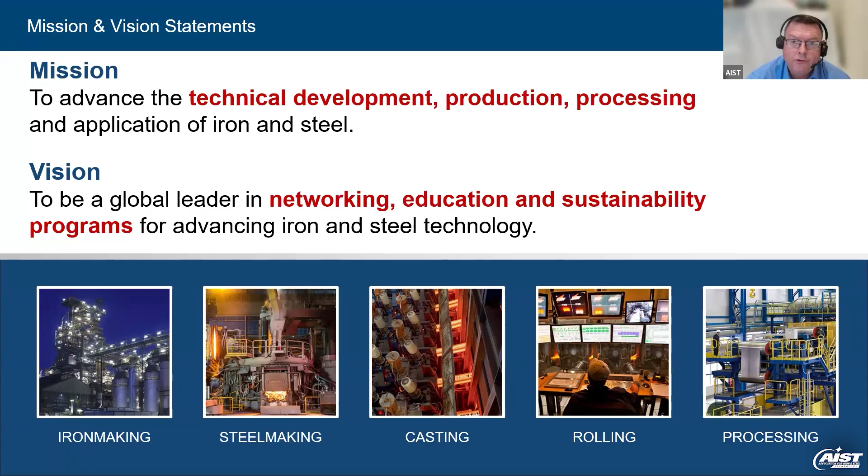Although AIST is headquartered in the USA, our mission is without national borders. So we promote membership wherever there is a strong value proposition to fulfill our mission and vision. We now have 22 member chapters on 6 continents. Each chapter conducts their own activities in their region. With this extensive network, AIST is positioned to interact with the global steel community and disseminate information about the latest technology advancements for steel wherever they may be evolving.

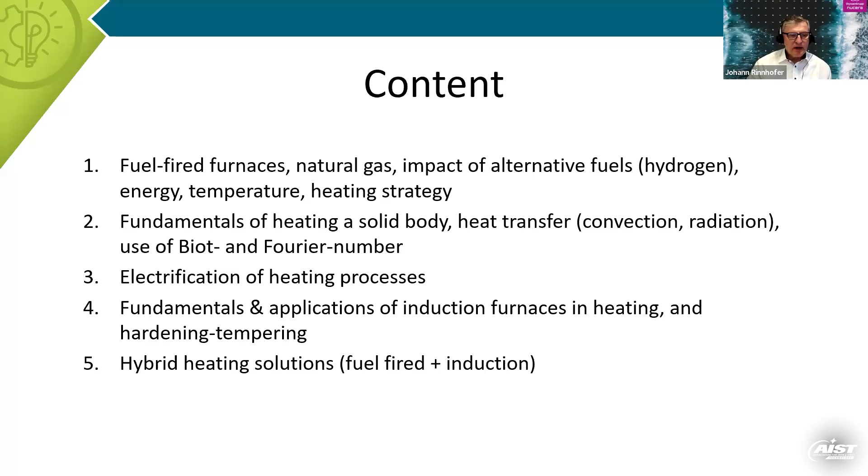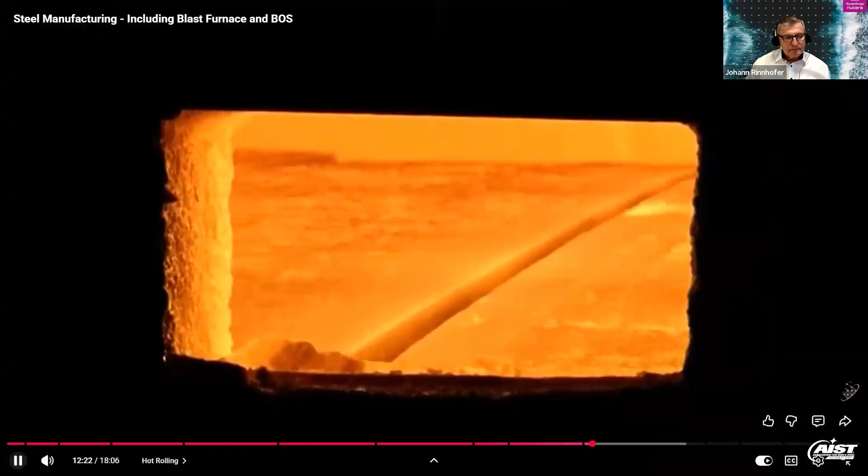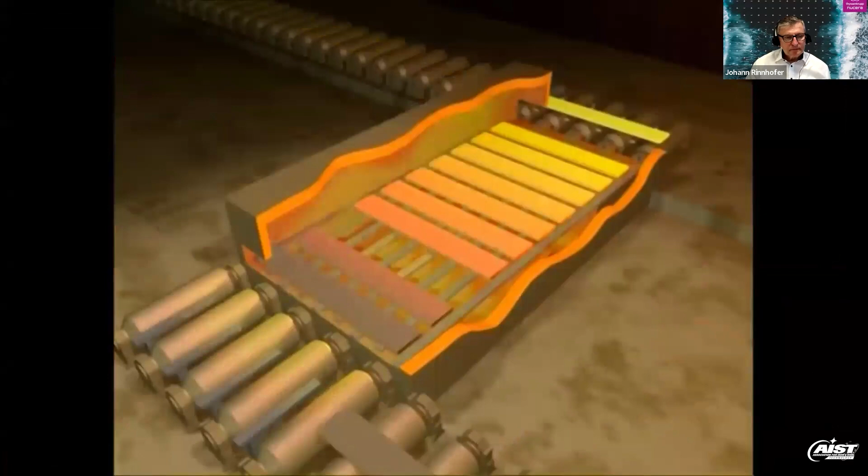So let's go into this little video. Steel is highly resistant to shaping when it's cold, and for that reason, it's generally rolled whilst it's hot. To make sure the steel is at the correct temperature for rolling, it's fed into a furnace. Here it travels through several temperature control zones until it's at the correct temperature and ready for rolling. Whatever the product, the principles of hot rolling are the same.

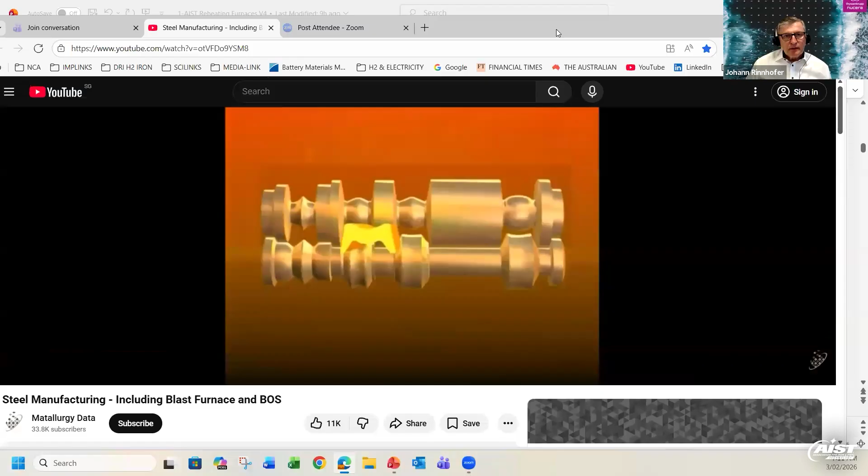It was a very short video just showing the walking beam furnace in a rolling mill. But why are we doing that? What is steel? Steel is, as you can see here on the iron carbon diagram, an iron carbon alloy with a carbon content of less than 2%.

It has different melting temperatures, so it can be 1500 degrees. It can also be 1150 degrees only when you have a carbon content of 4%. So it's a very interesting material. We have more than 3,500 types of steel for that reason, because we have so many options to alloy steel with carbon and also other alloys like chromium, nickel, and other metals, and also heat treat them in different modes, so to say.

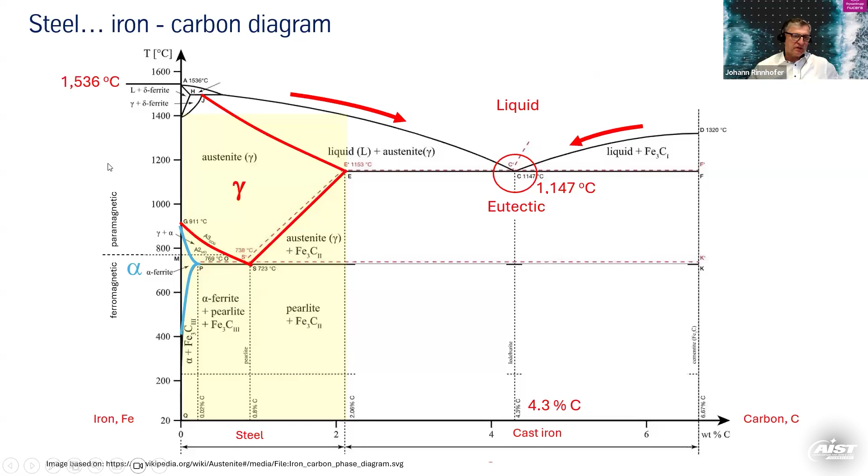A very interesting feature is the different crystal shapes which we can have. This is the austenite at high temperatures and the ferrite at low temperatures, and all sorts of combinations in the end. What we will also need later is a special feature of steel, which is the magnetic properties of the steel. Below the Curie temperature, which is around 770 degrees C, steel is ferromagnetic, and it is non-magnetic beyond that temperature. So that is very important for induction heating. This is why this is important.

Typical heating temperatures for reheating are in the area of 1200 degrees, because steel is malleable at this high temperature in the austenite area, basically. This is because we have a face-centered cubic crystal structure which offers slip systems. So you cannot shape and form steel in a cold condition like you can at these high temperatures, as we all know from the forges.

What is very significant is the magic line around 900 degrees. This is the red line where you come into the austenite area, and you can change the shape of the crystal, as we said in the beginning, from body-centered into face-centered. This is why we always have to pass this magic line, the austenite line, for heat treating, for austenitizing and hardening, for example.

Tempering can be at much lower temperatures because we don't necessarily change the crystal shape again. During rolling, forming, or forging processes, the austenite grains are constantly broken down and recrystallized again, which is why we get a very specific crystal structure in a forged or rolled product. We have all sorts of technologies like thermomechanical rolling and others, but we cannot go into too much detail here.

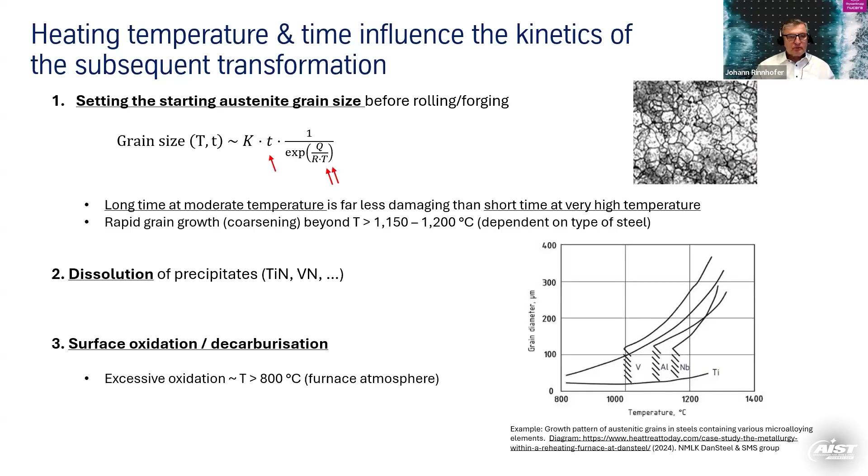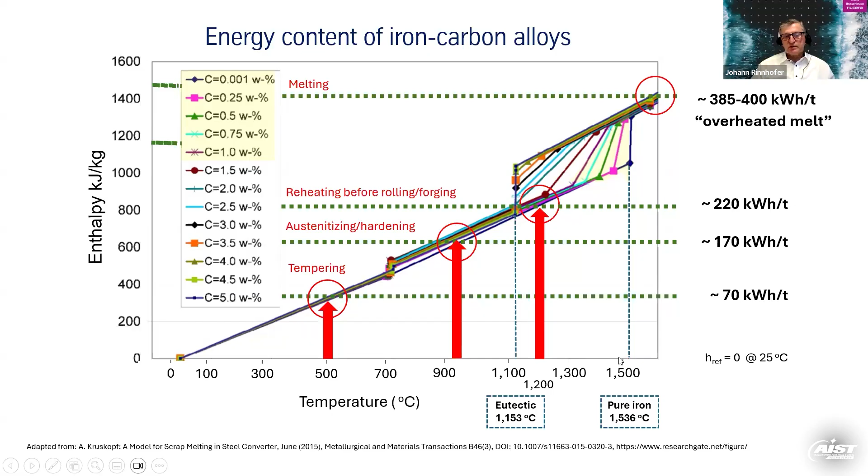So when we look at the major energy consumers in an electric arc furnace based rolling mill, you see the electric arc furnace has 385 to 400 kilowatt hours per ton incorporated energy in the steel, which in the end will require us to spend approximately 650 kilowatt hours per ton, because we are operating a real process with energy losses and other things that come with real conditions.

The same is true in the reheating furnace. We have this 220 kilowatt hours per ton worth of energy, which we end up spending approximately 330 on, because of losses. The rolling stands also have electric energy consumption. You can see that electricity in this whole process is approximately 40 to 55% of the total energy demand of these three aggregates, and the fuel is around 45 to 60%.

This depends on how you run the electric arc furnace, because you have different options. Either you use very low electric energy in the furnace with a high fuel rate, or the opposite - you can run it at very high electricity consumption with low fuel consumption, but we will never completely eliminate fuel consumption in the electric arc furnace. So the name electric arc furnace is a bit misleading in this sense, but this is how it is.

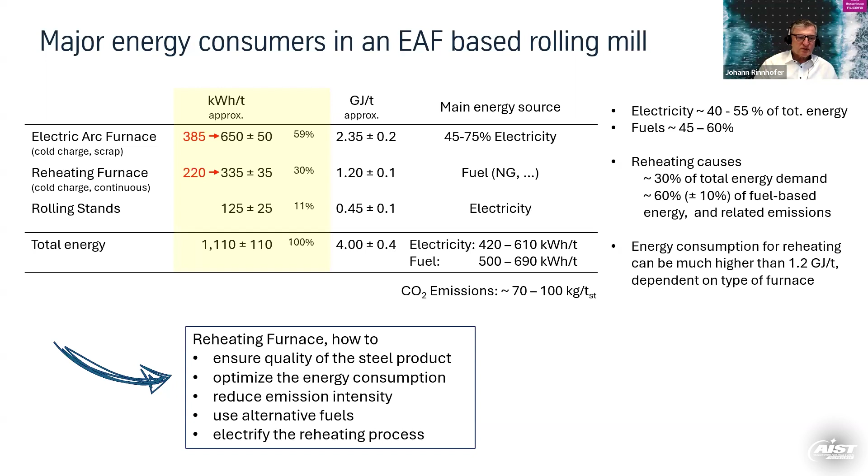Walking beam furnaces look approximately like that. We come in with the cold steel here on the left end and exit hot on the right side. You see a discharging machine here on the right side, and in the furnace we have a steam cooled system of tubes, like a stock carrier, so to say. This furnace is heated from the top and also from the bottom.

It usually has 3 significant zones. The hot zone, we have the soaking zone, which basically has the task of equalizing the temperature in the stock, from the surface to the core. In this zone, we operate at very high temperature, so there's not a lot of heat transferred in that area, but it's an equalizing zone, so to say.

A lot of heat we are transferring in the heating zone, which is in the middle here. We are heating up the steel, we still have a relatively low steel temperature, so it is a very good condition to transfer a lot of heat. This is a high temperature difference. We have large burners on the top and also on the bottom of the furnace.

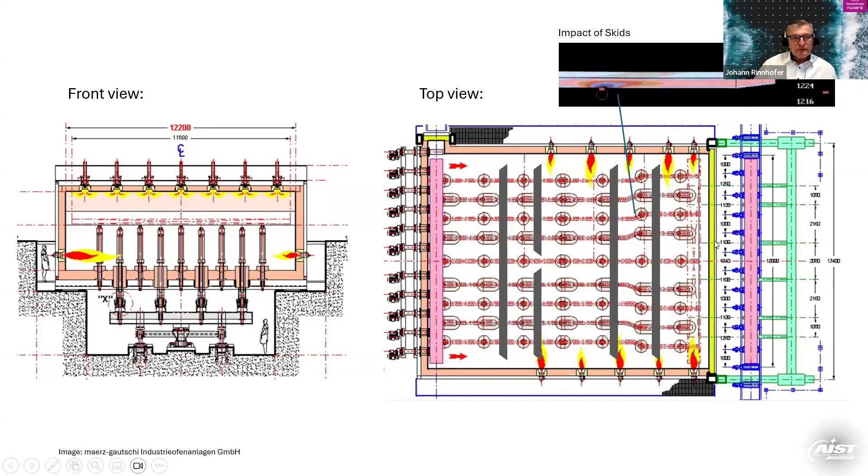When we look into the heating curve or temperature curve of these furnaces, they usually look like this. We start the heating process cold with cold steel, or it can be preheated, but usually cold. The furnace temperature is in the range of 700 to 900 degrees, and you have a very high temperature difference.

High temperature differences are very good for heat transfer, because the transferred heat is a function of the temperature difference from the furnace temperature to the surface temperature of the slab. We're talking about the surface temperature only, not the average temperature of the stock. The surface temperature is shown here as the slab top temperature, the blue line. The slab bottom temperature is the orange line, and the slab core temperature is the red line.

What we always have to look at is the temperature difference in the slab, shown here as delta T. It should not be too high, because we can get mechanical problems in the slab, including cracks, when this temperature difference is too high. So we have to watch the temperature difference and the surface temperature of the slab, and in the end we want a very equal temperature, say plus minus 20 degrees or so, in the slab. That's usually good enough for rolling a slab of 200 mil thickness.

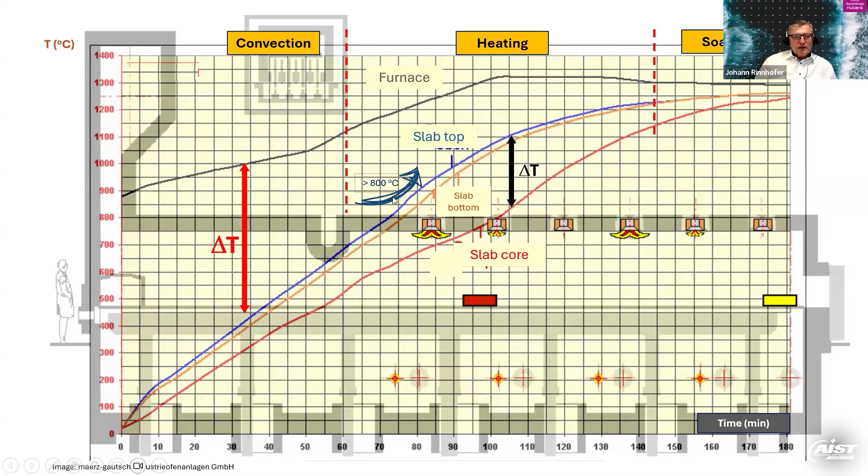So how do we design this process in the end? That's the question. We say, okay, scale is not good, so we're in the range of say 1% scale from the steel weight for such a heating process. It can be 3% - for example I saw 3% already in rotary hearth furnaces where you heat billets for a tube rolling mill, because you have a very high surface to volume ratio of these small billets.

On one hand, this is an economical loss because you're losing material - you're burning steel, basically oxidizing it, which gives a little bit of heat too, but iron is not a very good fuel in the end. So scaling is bad on one hand. On the other hand, it's good because you're healing surface defects on the steel, exposing virgin steel again, which is a good feature of scaling. So it's not only bad, it's also good.

So this is how it looks like. We are heating such a billet of 200 mil in a time period of approximately 180 minutes. This is just an indication of how these furnaces look like.

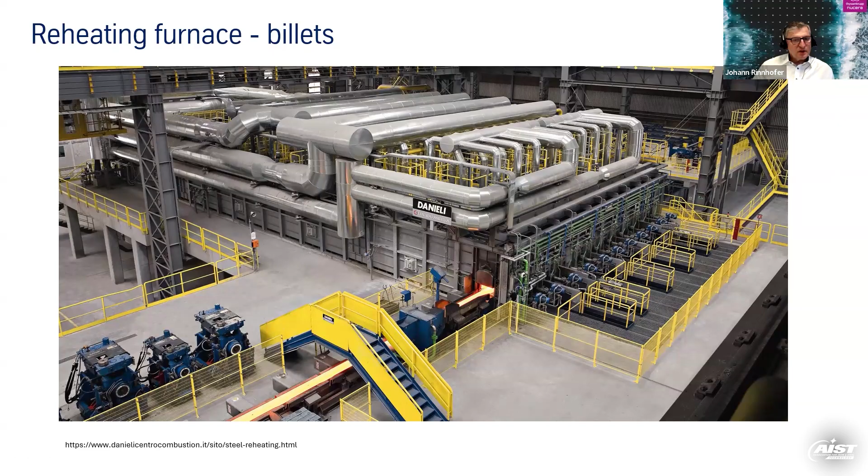You come in cold on the left side, go through the furnace, end up hot, and exit through a little door on the side in order to prevent air ingress. You see the small burners here in the soaking zone because, as I said, there's not a lot of heat transfer there - small burners. We have a lot of heat transfer in the heating zone, so large burners. And you see here the insulated air system - this combustion air is usually heated to 400 to 600 degrees Celsius in order to save some natural gas.

That's another view. So here you come in cold from this side, and come out hot here. Small burners in the soaking zone, large burners in the heating zone.

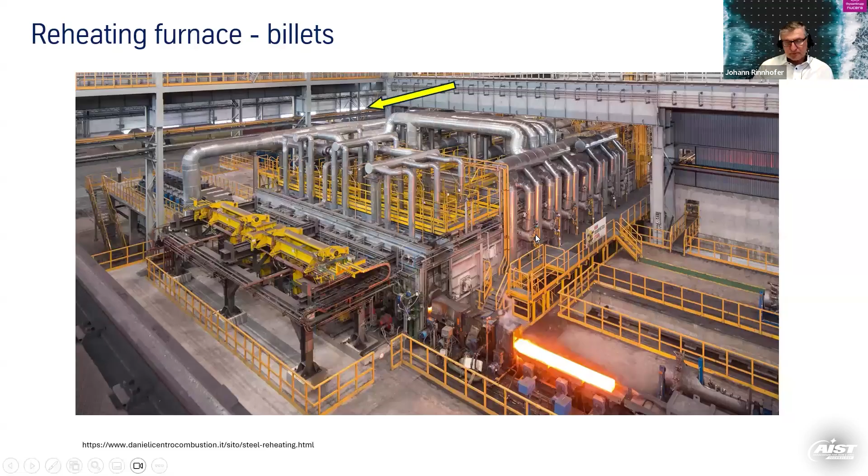This is how it looks inside the carrier system. You see here also there is an offset of the carrier system. And here it's all insulated.

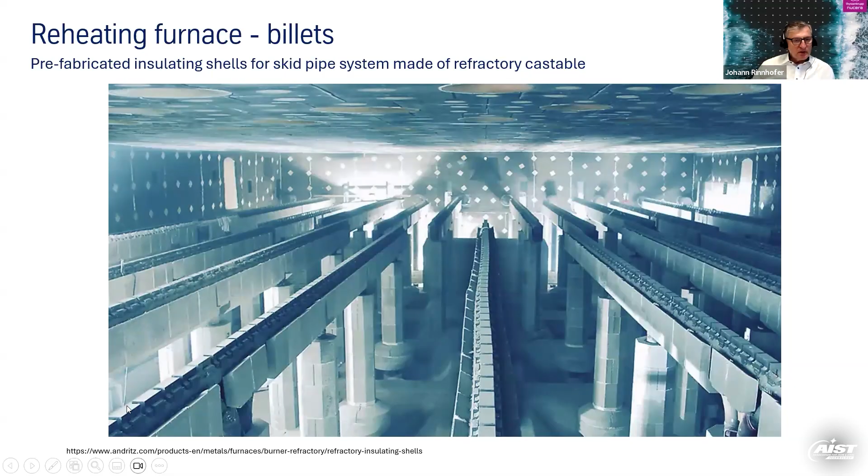It's a completely new furnace. You see the burners here on the top, radiation burners. You see the castings here on the top of the carrier system, which are carrying the slabs or the billets.

This is how a furnace looks like inside. See the refractory system, which is usually an aluminum oxide, silicium oxide system, refractory, and all precast or cast parts here. You can also have bricks, obviously, but this is usually how it is done today.

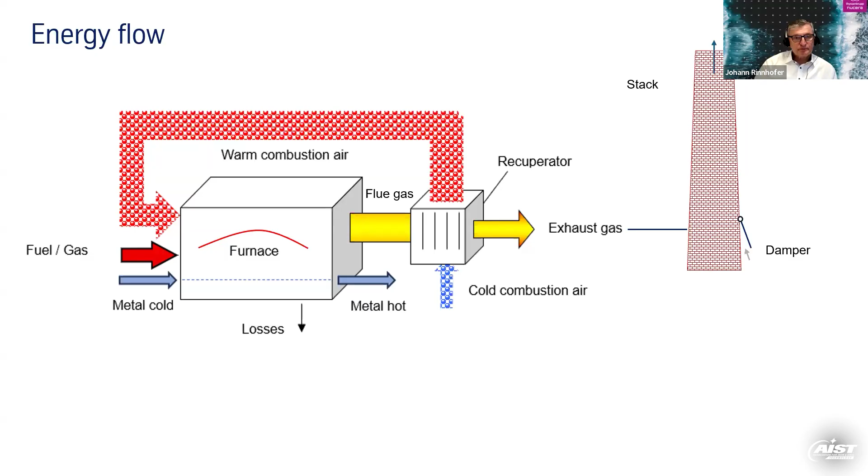So looking into more detail, what we do is look at the energy flow in the metal, here shown on the bottom, and also the energy flow of the gases. So we have the incoming gases, which is the fuel, and also the hot air with the sensible heat in the air that goes into the furnace, and out comes the flue gas. And there's a difference between these two energies. So we have the fuel and air coming in, and the flue gas going out of the furnace.

And if we relate this to the energy coming in with the fuel, we have this heating efficiency. So the difference between the incoming energies and the outgoing energies, when you look at the gas only, they are sort of useful to these energies go into the metal and also the losses of the furnace in the end. So we can say the thermal efficiency or heating efficiency of this furnace you can describe by the difference of the gases coming in and coming out, the energy of those gases, and they are covering the metal and the losses, the heat of the metal and the losses in the end.

So this is how you can calculate the thermal efficiency of this furnace, and we don't do this in more detail here. For rolling mill furnaces, they are around 0.65 to 0.7, maybe 0.8 maximum for a continuously operated furnace. So you always have some losses, and usually we will see that the flue gas loss is the highest loss.

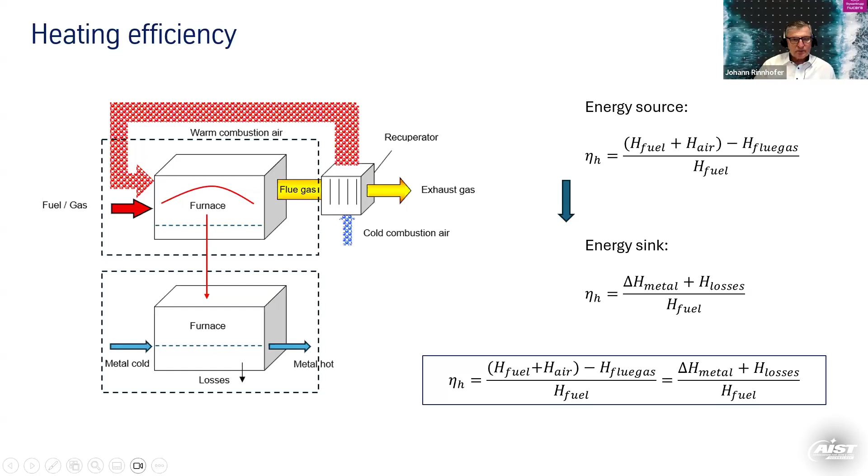So you have approximately 10 cubic meters of air for 1 cubic meter of natural gas. You have approximately 33 cubic meters of natural gas for 1 ton of steel. That equates into 330 cubic meters of air, or 400 kilos of air for 1 ton of steel in the combustion process. So when we calculate the energy in the combustion air now at 450 degrees and also 1000 degrees, we will end up at 52 kilowatt hours, just sensible heat in the air, or at 1000 degrees, more than 100 kilowatt hours per ton of energy in sensible heat in the air.

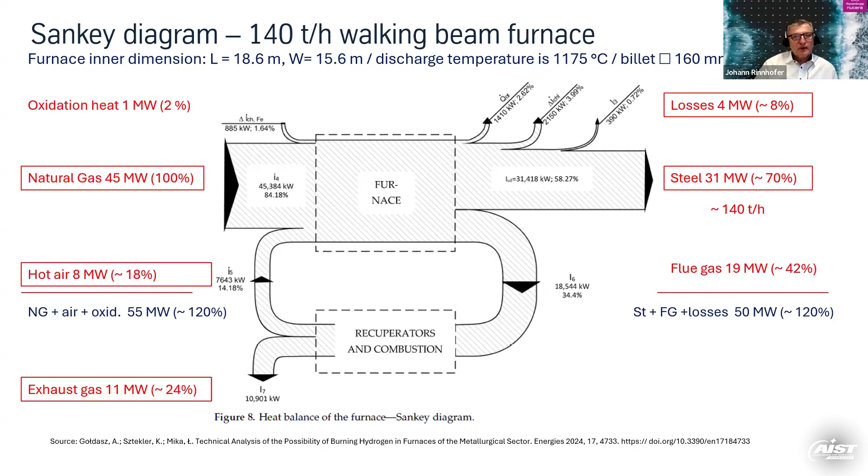So what to do? What are the variables and parameters we can optimize? We can obviously try to increase the stock inlet temperature. That will help, no? If we come in with 300 degrees, obviously we need less energy to heat it up in comparison to room temperature. We can try to reduce the flue gas temperature, because as we have seen, the flue gas is the highest loss of the furnace. So if possible, we want to have a low flue gas temperature.

How can we achieve that? It's not so easy. We have to improve the heat transfer in the furnace, or we can make the furnace longer, which we usually don't desire, because we want to minimize the footprint and also minimize the cost of the furnace.

Yeah, you have to make decisions in the end. There's no 100% one-fits-all solution. You can change the heating strategy. You can go higher with the temperature here in the heating zone, for example. What does it mean? You have higher temperatures in the stock, and so on, scaling, all sorts of things.

You can reduce the whole processing time by improving the heat transfer. What does it all mean? It has to be really carefully looked at. There's no, as I said, one-fits-all solution. Every furnace is different in the end.

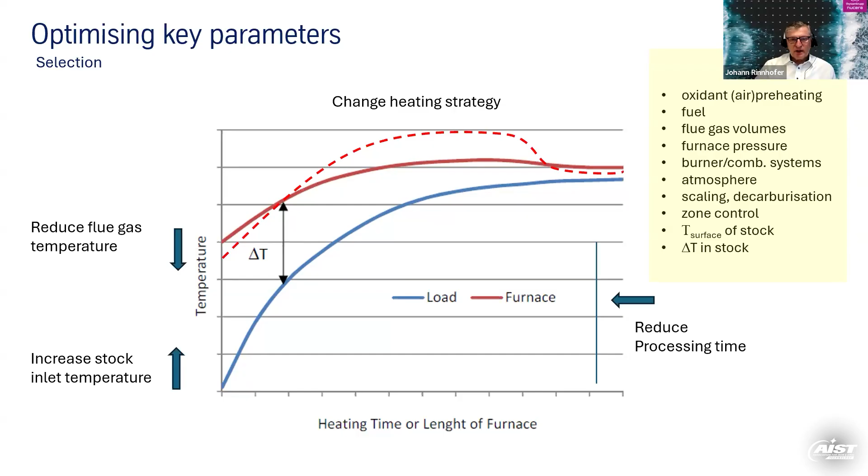Just showing an example, we earlier used to optimize furnaces, not only building new ones, but also optimizing the way how you operate a furnace. This shows a 100-ton slab furnace in Germany, length 30 meters, width approximately 7 meters, heating slabs of 245 mm thickness.

That furnace has a soaking zone built traditionally as a ceramic soaking hearth. That's the usual way they built furnaces in earlier times. We have the flue gas going out through the bottom here, which is actually a good solution. We don't want to go up here if possible, so we want to drive the flue gas down over the slabs into the flue gas duct.

We have a little convection zone here, and then very large burners on the bottom of the furnace in the heating zones, and a lot of roof burners here. In the end, we have no option to actively heat the soaking hearth from the bottom, because there is a ceramic hearth. There's no way to change anything there, so it's not very good in the end for heating. And I will show you why.

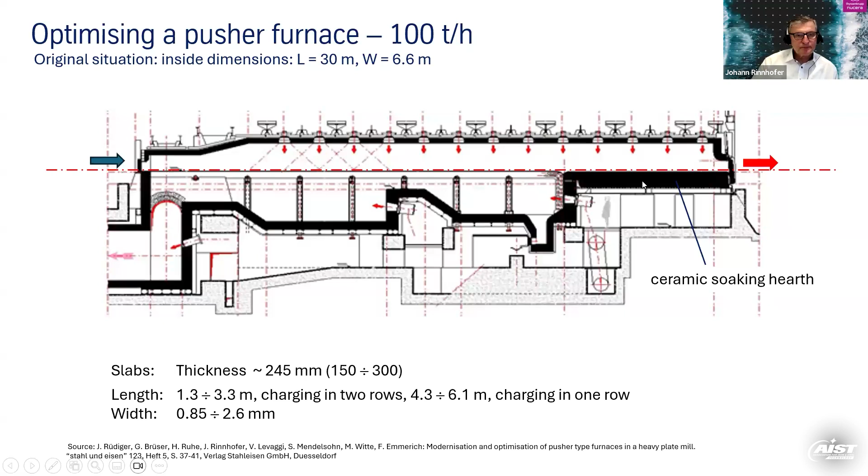Originally, the furnace looked like that. We had, as I said, very large burners in the lower furnace. That means the slab bottom temperature went up and up. It was a very high temperature, a lot of scaling there, and in the end, very high temperature differences in the stock - all sorts of things you don't want to have.

And that was necessary in order to arrive, before we go into the soaking zone, at a very high temperature, because we have no option to heat from the bottom in the soaking zone. That means we have to put all the energy needed into the slab in that area on the left side - there was no option to heat in that area.

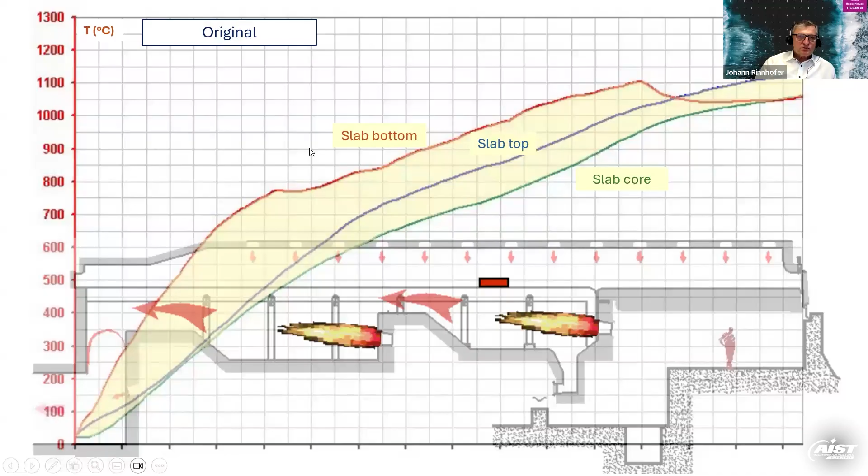We can actively heat the bottom of the furnace in the soaking zone. That means we are still increasing the temperature here, and we have a really good, very low temperature difference at the end, which is very beneficial for the rolling process and the quality of the end product. So that's in short the option we have now, because we rebuilt the furnace completely to a different heating strategy.

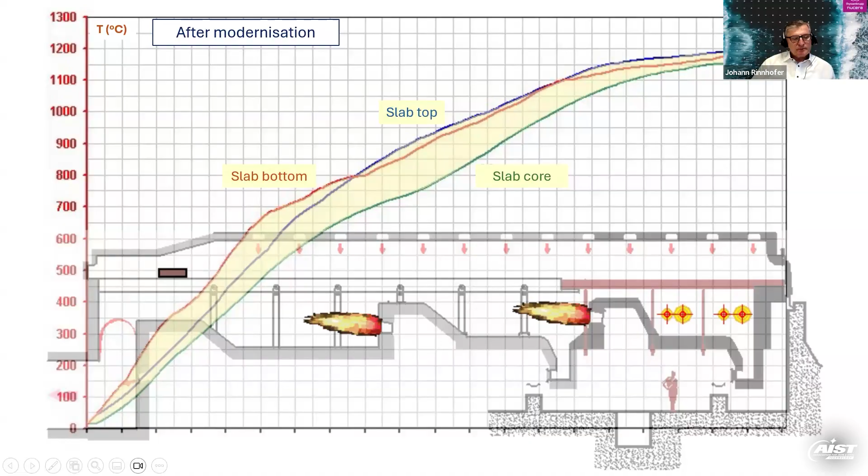When you come out with the slab onto the roller table, the scale will cool down and it will show a lower temperature actually. So you measure a lower temperature when you look at the scale outside the furnace, and a higher temperature when you look into the furnace at the scale. So you have to be careful what you measure when you look with a pyrometer.

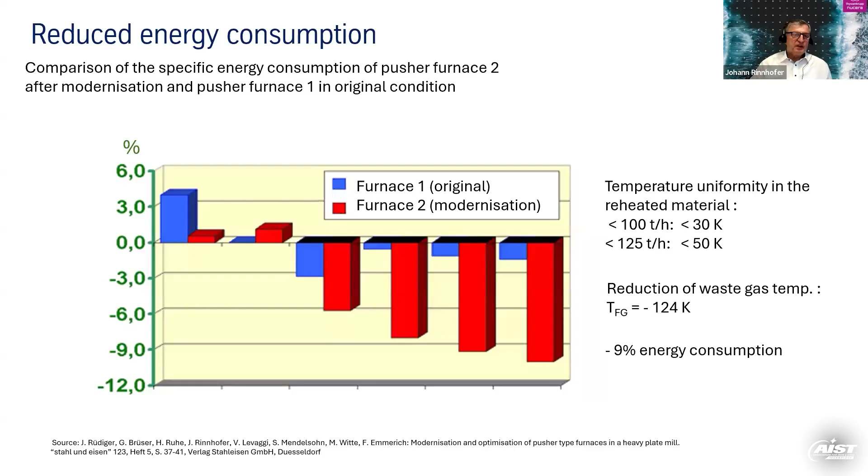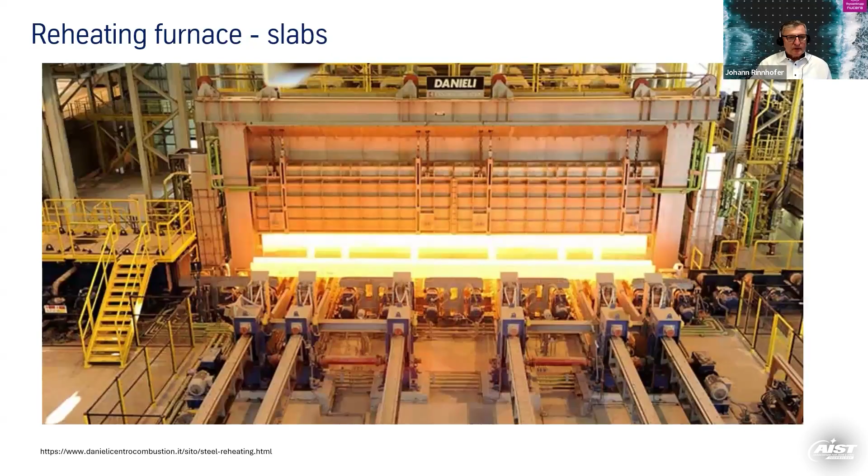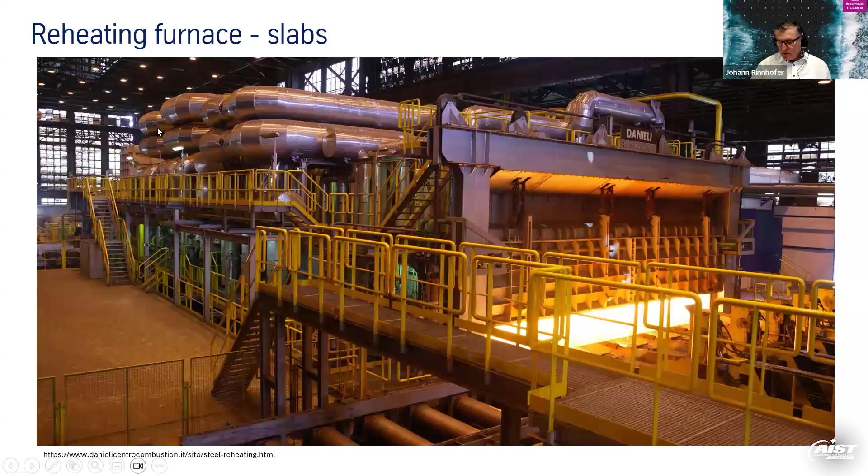Another example is a walking beam furnace for slabs in Denmark, at Dansteel. You see here the exit of the furnace. Just a few data points: it also handles 100 tons per hour, with 200 to 400 millimeter thick slabs, so fairly thick slabs, for a heavy plate mill. You have only 0.65% metal loss from scaling, which is a very, very good value.

You wouldn't have that with billets, most likely, because with slabs you have a very small surface to volume ratio. As I said, you can have 3% or even more metal loss when you look at rotary hearth furnaces and smaller sized stock.

Very interesting, you see here 31.4 cubic meters of natural gas. I estimated this with 10 kilowatt hours per cubic meter of natural gas, lower heating value. So you arrive at about 1.1 to 1.2 gigajoule per ton, or approximately 330 kilowatt hours per ton, again related to the energy content of the steel, which is around 220 kilowatt hours per ton.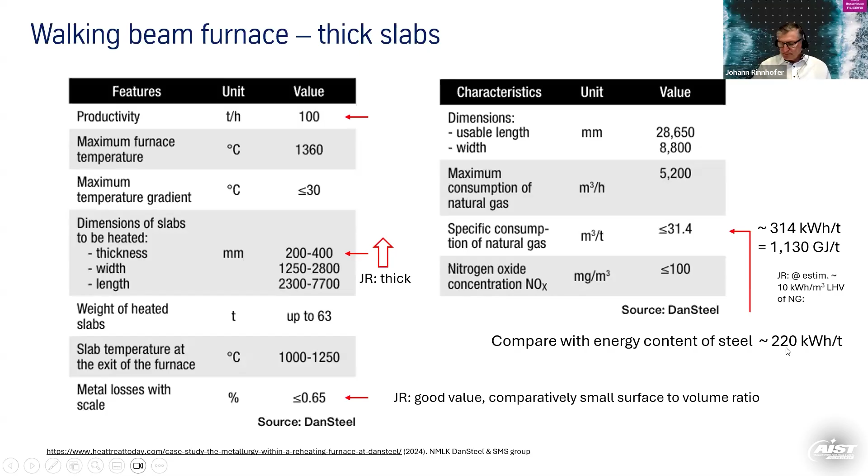How do you heat a 250 millimeter slab compared to a 400 millimeter slab? The difference is the heating time, obviously, but everything else is very much the same. In the end, you arrive at about 1 to 1.4 minutes per millimeter thickness of slab on average. So this 1 minute per millimeter is a typical specific heating time for, say, 250 millimeter slabs.

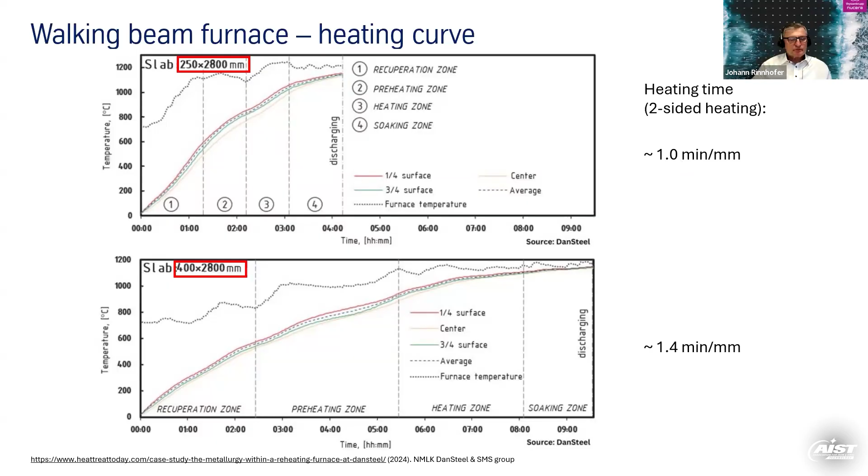Let's go into the fundamentals. What is the Biot number? It describes the thermal thickness of a slab, for example. So what does that mean? We have an external heat flow, the heat carried from the outside to the slab. This is the heat transfer coefficient times the furnace temperature at infinity minus the surface temperature of the slab. And we have the inner temperature from the surface to the center, at position X equals S, which is the thickness of the slab.

When the slab sits on an adiabatic hearth, that means an insulated hearth, there's no energy carried over that line into the hearth. This is an idealistic view of the slab sitting on an insulated hearth. So we have external heat flow and internal heat flow in the slab, and when we set external equal to internal, we arrive at this equation.

Next, we put all the temperatures on the right side, and all the other properties on the left side. So we end up with H, the heat transfer coefficient, divided by the heat conductivity times S, the thickness of the slab. That is the Biot number, which describes the thermal thickness of the slab. It can be considered thermally thin when the Biot number is less than 0.1.

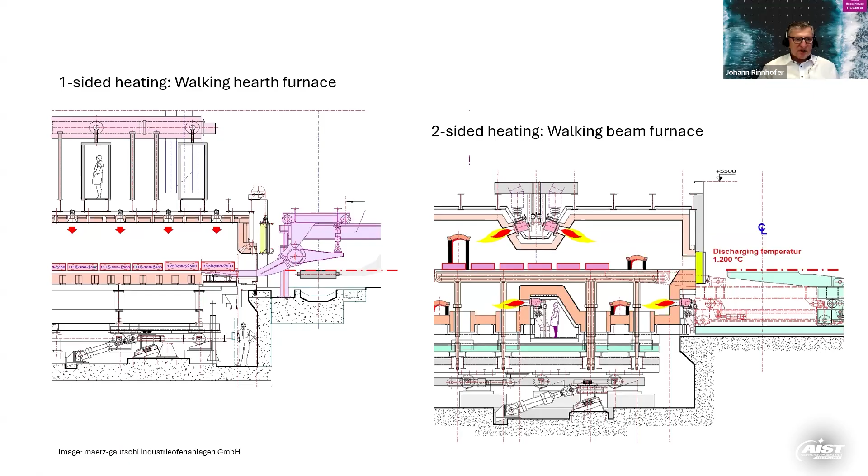Look at a very brief example, steel versus aluminium. When you say thermal thin requires a Biot number of less than 0.1, you ask the question: is a steel slab of 120 mil thickness, 0.12 meter thickness, thin or thick at certain heat transfer conditions? We say heat transfer condition is 40 watts per square meter in Kelvin. Then we say Biot number is H divided by K times S, which is 0.1. This is still in the upper end of being thin, so it is still thin.

And what does it mean for aluminium? We have a different heat conductivity, 200 compared with 50 of our steel slab. So we have 40 again, this is the heat transfer divided by 200 here. And S, this is what we look for, should be less than 0.1, because this is the magic number for the Biot thick and thin difference. So we say S can be less than 0.5 meters for an aluminium slab, and it still qualifies as thin. So it might be half a meter thick compared with steel, which is only 120 mil thick, and it still has no significant temperature differences in the slab.

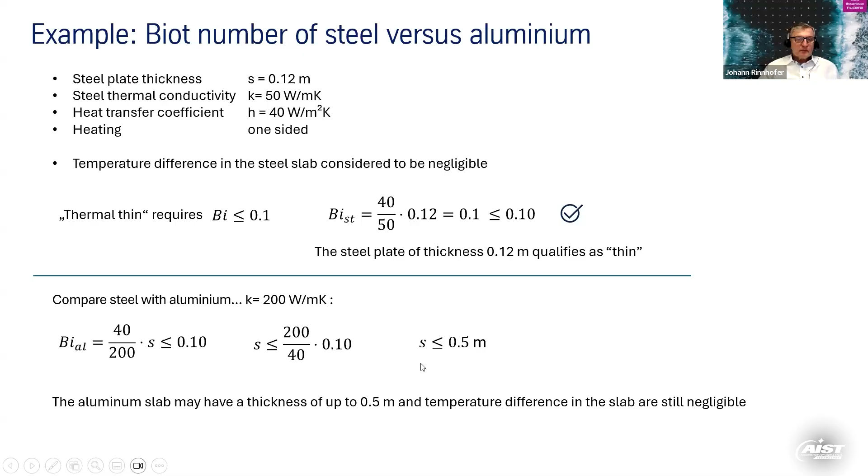When we look at this Biot number, we talk now about this heat conductivity, which is shown here. What is the heat conductivity of steel, the thermal conductivity of steel? You can see normal carbon steel comes down from the area of 50 watts per meter Kelvin and goes down to say around 28 or so in the area of 800 degrees, around the Curie temperature of 770 degrees.

And stainless steel, or some austenitic stainless steel types, they come from the complete other end. They start at 15 watts per meter Kelvin, and they also go to this area of 28 in the area of 800 degrees or so. Then they go up to the final heating temperature at 1200 degrees, very, very much the same, so to say. So there's a huge difference in the Biot number when you look at the area below 800 degrees. So this stainless steel is already thick material, it has significant temperature differences in the stock compared with a carbon steel, for example, in certain heating conditions.

So you cannot say steel is equal to steel. You really have to look at the type of steel and at the heat conductivity when you look at the heating process. This is why that can be a completely different heating strategy for stainless steel in that lower temperature area here, up until 800 degrees.

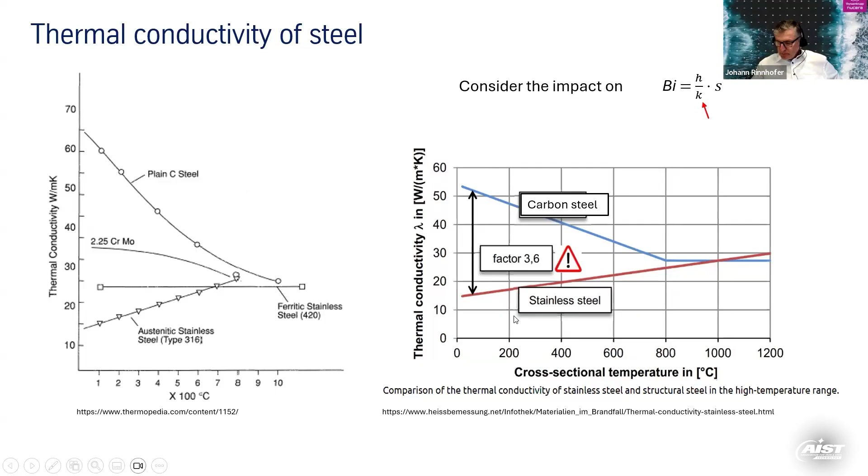Look at the Fourier number. We talked about Biot before, this is the thickness, and now we talk about the heating time. The Fourier number gives us the dimensionless heating time, so to say. What does that mean? We now look just at the inside of the body, so no external heat transfer anymore.

We say the conducted heat in the body is this expression here: the thermal conductivity divided by S, the thickness, times the temperature difference from the surface to the core, times the time we are heating.

And you compare this conducted heat with the stored heat in the body. So this is the equation: energy conducted is approximately equivalent to the energy stored, which is this delta T, the temperature difference, because when you heat it from the outside, the temperature will increase. That is related to the heat capacity and the density, and also S again, the volume of the body in the end.

So in the end, when you have this equation, you take the S from the right side and put it over to the left side. You end up with S squared here. So you have K divided by rho times heat capacity times S squared times T. And this is the Fourier number, which describes the dimensionless time: alpha, the thermal diffusivity, times the time divided by S squared.

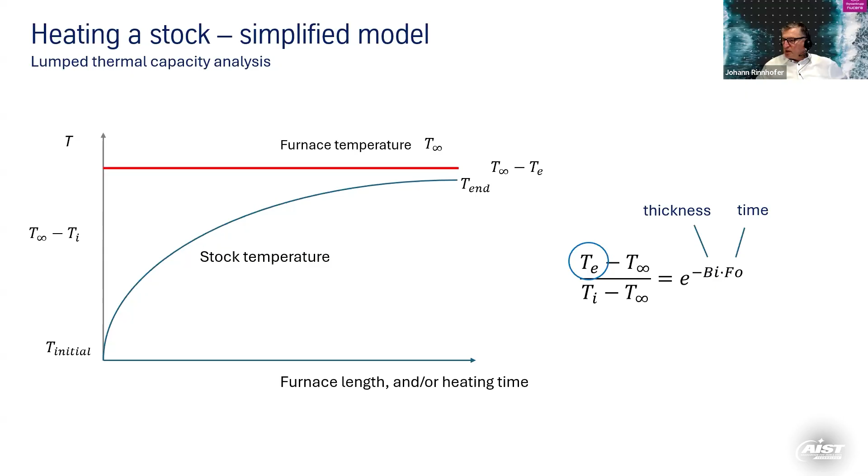And this is what we will see now: you end up with this equation for a thin stock. The temperature difference at the end divided by the temperature difference at the beginning is equal to E to the power of minus the thickness and the heating time. That's very easy to calculate. We don't go into too much detail because it's a bit awkward probably, but this is how it works.

You say, when you heat a plate of thin thickness, that means you have no significant temperature differences in the stock. You say the supplied energy from the outside to this body is equal to the stored energy in this body. And then you go through this whole calculation, including an integration. You will end up with this logarithm here.

And you can calculate the heating time, and you see again this expression here for the temperatures. You can calculate the final temperature of the stock after a heating time T, which is shown here. We don't go into too much detail because that would cost too much time probably.

So this is for convective conditions, so the supplied energy from outside is a convective expression: H times a temperature difference, a linear temperature difference. This is very much different at radiation heat transfer, because you are talking about T to the power of 4 when you talk about radiation. So you have a slightly different expression, and this awkward expression for the heating time in the end.

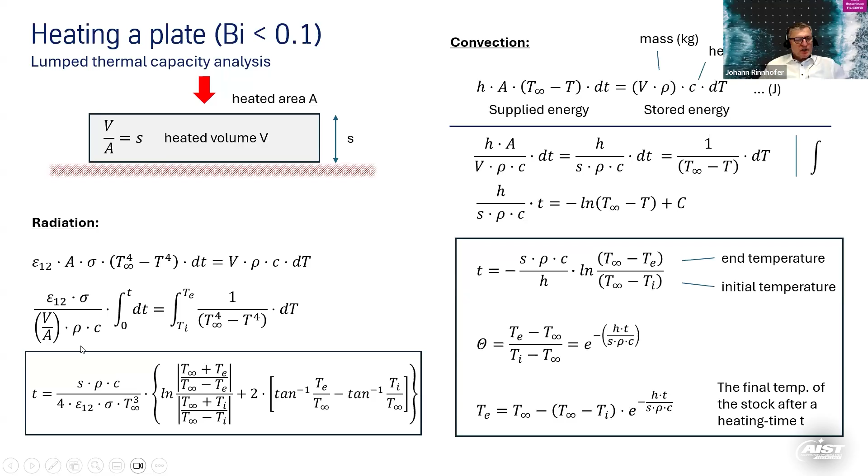So when you look at this expression here, which we found in this calculation, when you modify this exponent, you extend it with K because there's no K, no heat conductivity in there. So you add a K here, you add a K here, then you end up exactly with these expressions for the Biot and the Fourier number. That's the message. So again, you will find this expression here.

The dimensionless temperature difference is E to the power of minus Biot times Fourier. This can be generalized, and you can calculate the end temperature from this expression, using an n plus 1 factor. N is 0 for the plate, 1 for the cylinder, and 2 for the sphere, because of different volume-to-heated-area relationships. So that's all good for thin stock, lumped thermal capacity analysis, where the Biot number is less than 0.1.

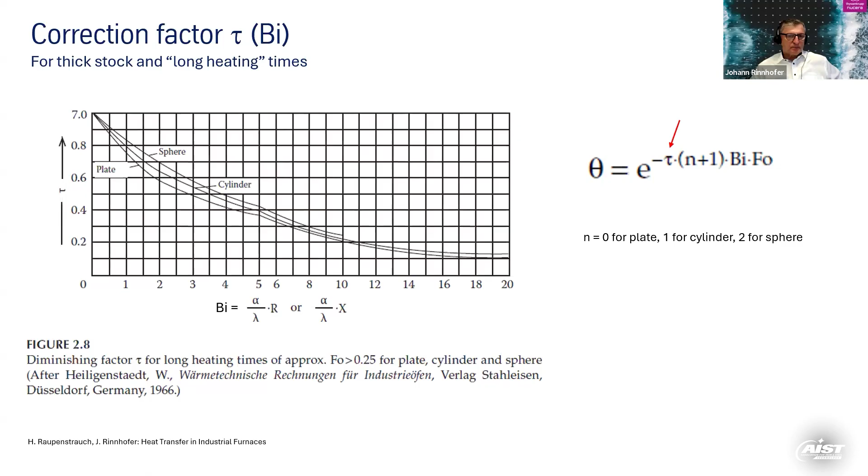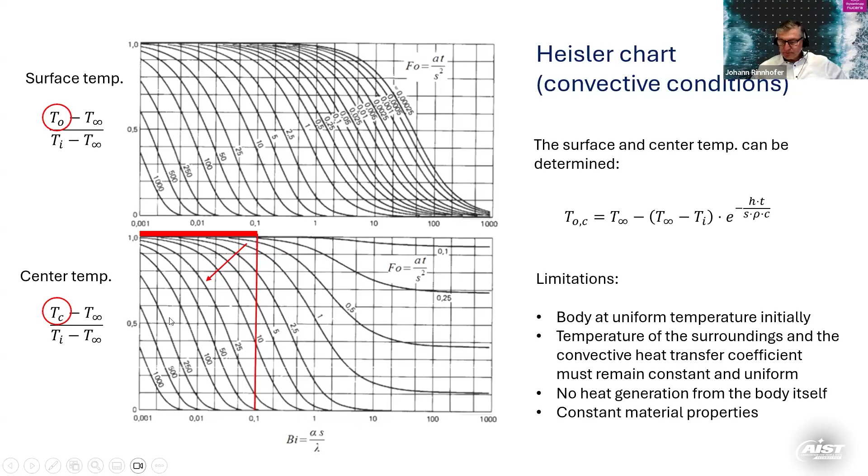So I think we'll speed up a little bit, otherwise we won't finish.

Now let's look at gas and wall radiation. We have the Stefan-Boltzmann law, which says a body inside another body in a heating condition is heated by the walls, by the surface temperatures. You see here the range of wall radiation between 1250 degrees C and, for example, 1000 degrees, ending up at around 100, 130, 150, 200 kilowatts per square meter.

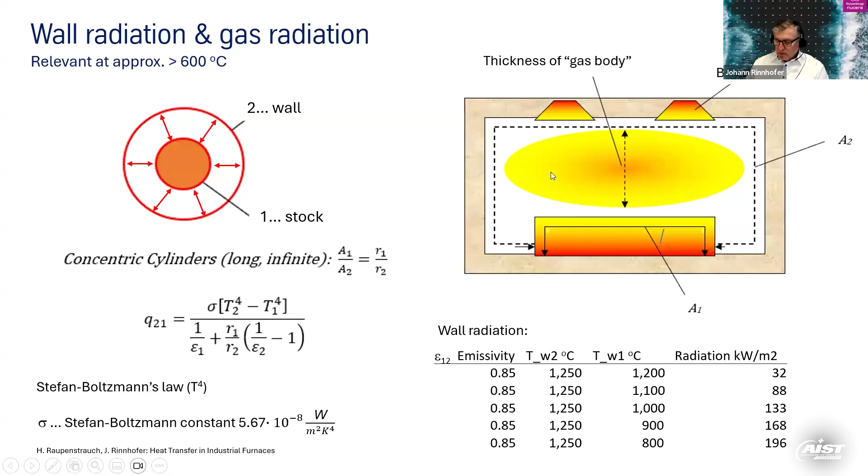But there's another component: the gas body itself in the furnace, because there is also a radiation component from the gas. Looking at the wavelength spectrum of the temperatures we're talking about in the furnace, we're operating approximately between room temperature and 1500 degrees, so we are in the infrared spectrum of the wavelength. This is important to note when we look at gas radiation especially, infrared in comparison to visible radiation, which has a smaller wavelength spectrum.

To cut a long story short, all triatomic gases absorb and emit radiation heat or energy. They are not like a gray body or a black body, radiating continuously over the wavelength spectrum as shown here, but gases are selective radiators, with only certain spectrums of wavelength where they radiate and others where they are essentially invisible, with no impact. In the end, you have a net gas radiation from a gas body to a wall, expressed similarly to wall radiation, with the emitted heat of the gas body on the left side of the equation, and the absorbed energy on the other end, related to the wall temperature.

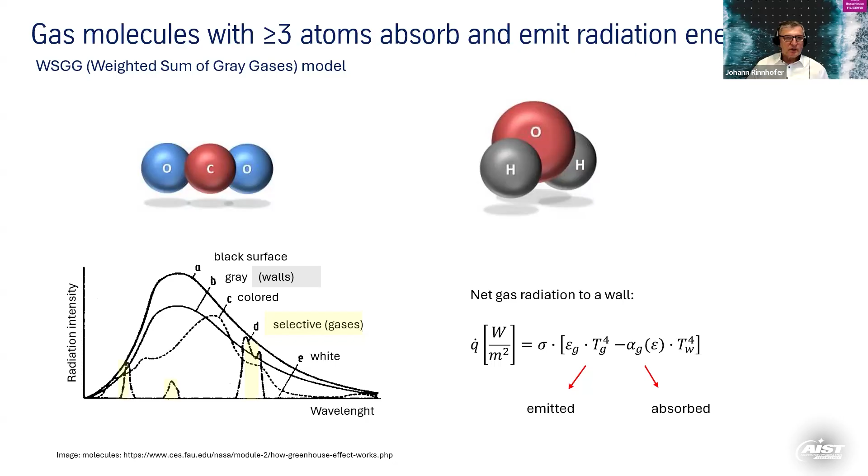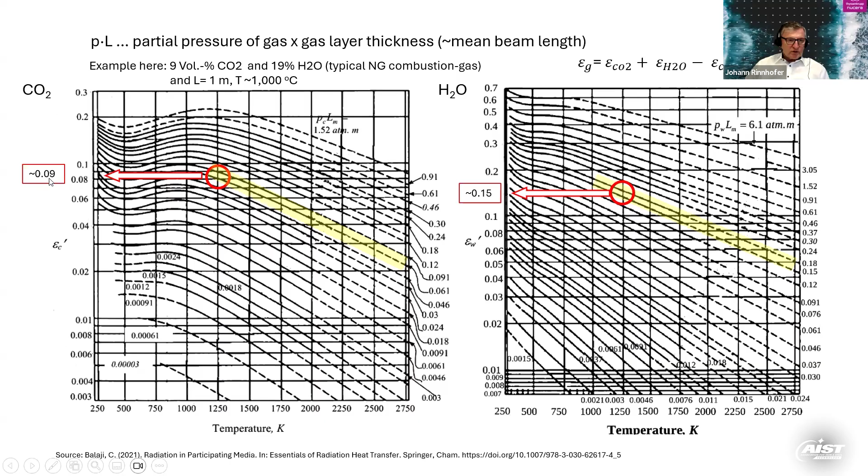Gases like H2O (water), CO2, CH4 and others emit and radiate in different gas spectrums. We have another chart here - I won't go into too much detail, but it's important to understand that the radiation of a gas is proportional to the content of the specific gas in the gas body, for example 9% CO2 and 19% H2O, which is typical of natural gas combustion. This is multiplied by the thickness of the gas body, so P times L is the significant number here. For example, at 1 meter thickness with 9% CO2 content, you end up at 0.09, and similarly with water. That doesn't sound like a lot, but you multiply this with the temperature in Kelvin to the power of 4, so it ends up being a significant number.

What does it mean in the end? That's the question, if you're changing the gas, for example, from methane or natural gas to hydrogen, ammonia, or methanol. So you can ask this question.

So you wouldn't have to change a lot in the off-gas system probably, but certainly in the inlet system of the fuel for the furnace.

In the end, when you burn natural gas, you have CO2 and H2O, both components in the combustion gas. If you burn hydrogen, you have only water steam, no CO2. The same applies for ammonia. That leads to sort of higher temperatures.

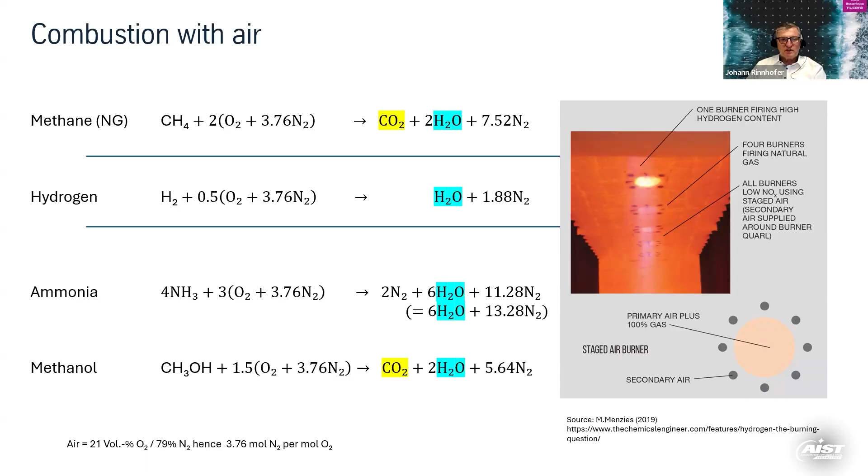Here's a picture shown with hydrogen content in the natural gas. So you end up with higher temperatures in the hydrogen-fired burner because the adiabatic heat of combustion temperature of hydrogen is higher. This is what you see here.

You see here, natural gas, you have 9% CO2, 19% H2O. With hydrogen, you have no CO2, but 34% water. And you can even have 100% water if you have just oxygen as a combustion medium. You see the temperature of hydrogen is much higher, the flame temperature, in comparison to natural gas. So there's a change, obviously.

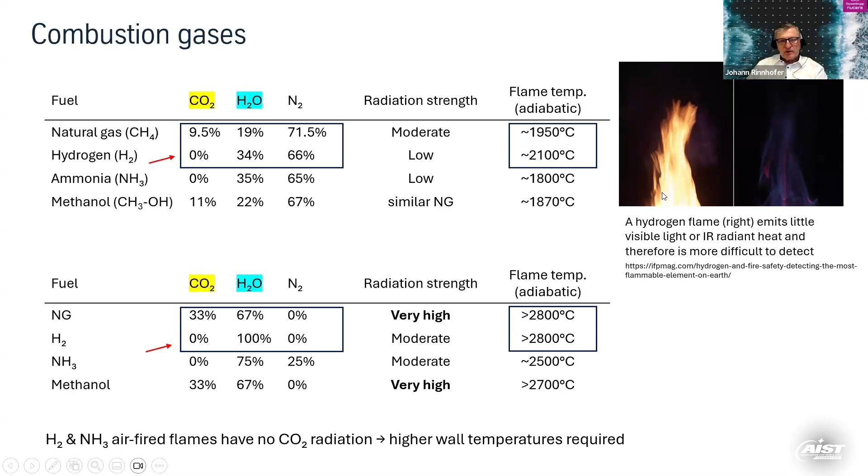Just looking at this picture here, the hydrogen flame, you almost cannot see it. It's almost invisible in comparison with a natural gas flame.

So you really have to look at the different zones of the furnace and the layout of the furnace to determine what's happening there. But obviously, just using hydrogen is not a solution.

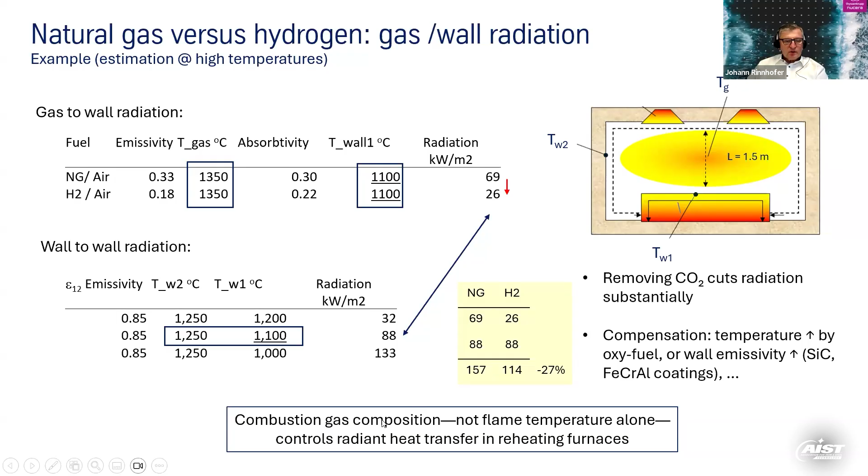You have to compensate the lower heat transfer by, for example, oxy-fuel or increasing wall emissivity by FeCrAl coatings and other things. So it's not so easy as it looks. It's not good enough just to look at the heating value. This is the message: combustion gas composition, CO2, H2O, not flame temperature alone, controls radiant heat transfer.

That's the message. And now we talk about something completely different.

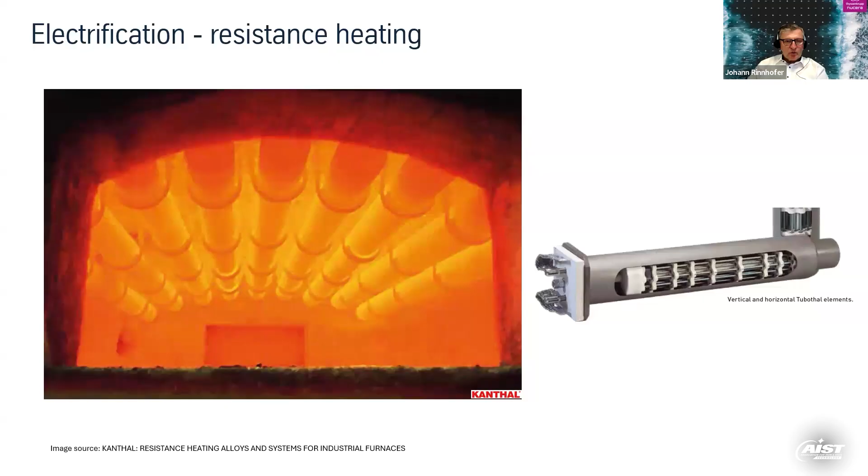Electrification, resistance heating. This is showing typical radiation tubes operated with electricity. There are different options available, wire elements for resistance heating of furnaces. So it is possible to heat furnaces with this.

I built furnaces in Norway 20 years back already, just heated by electricity, but just, I would say, normalizing furnaces in the area of 1000 degrees approximately.

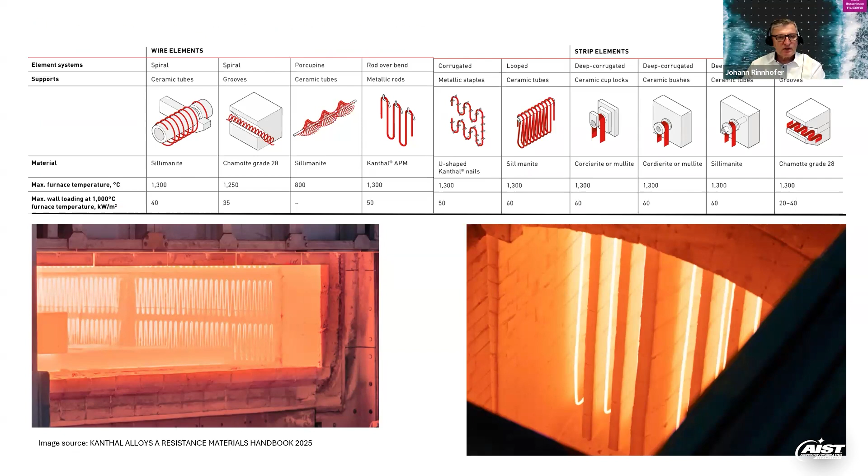The main message is shown here in a diagram from Kanthal: at the higher temperature range, say 1200 degrees Celsius or so, you end up with 25 kilowatts per square meter. This is the wall radiation, the average radiation when you have a wall equipped with heating elements, so to say.

So there's a limitation, obviously. That's probably good for lower temperature furnaces, but in the higher temperature range, you have to be careful. You really have to look at what you're doing.

There are other operational questions, obviously, also furnace atmosphere corrosion, temperature fluctuations. You really have to look at what's happening there, because in the end, not everything that's technically possible is useful in an operational condition, probably. So you really have to look at it in more detail.

But it's possible—electrifying the heating process is possible. We have a very high thermal efficiency of more than 90%. When you compare it with fuel-fired furnaces, this is very high. There are no direct emissions, very good to control, so to say. Of course, you have to be careful with hotspots and other things, but it can all be managed.

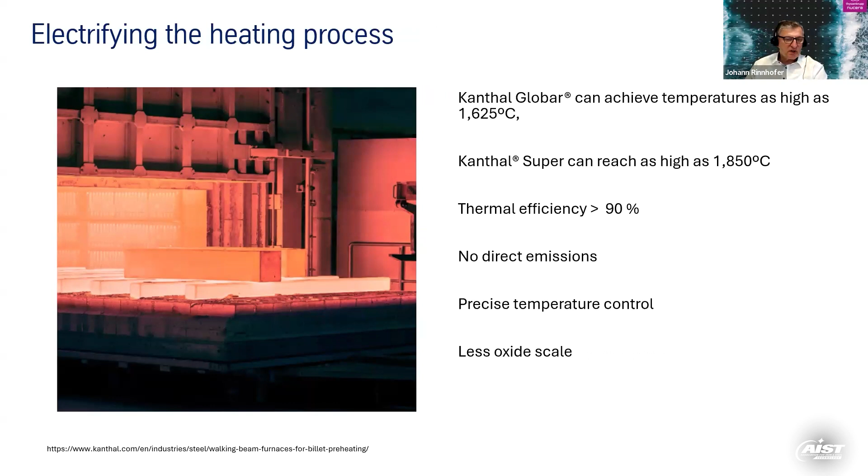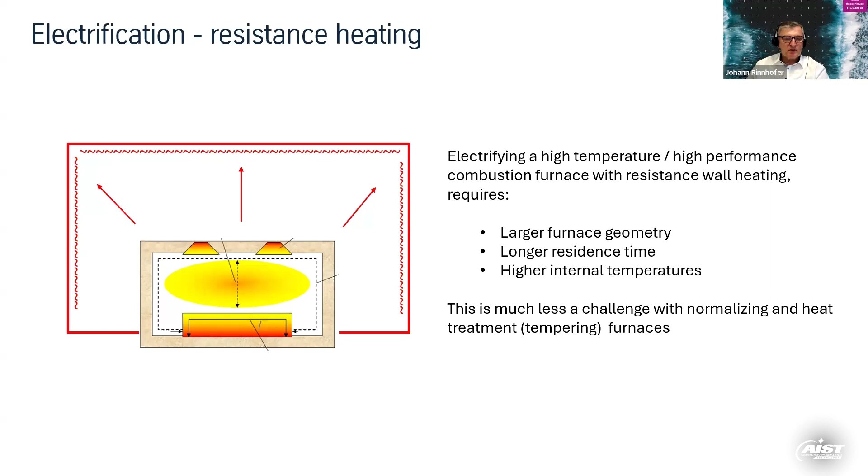At high temperature, high performance combustion furnaces, you really have to look in more detail at what you are doing. As I said, you probably need a larger furnace geometry and longer residence heating times for the electrification case. So usually you cannot just say we don't use any gas, we just take some heating elements and stick them into the same furnace. You have to change the geometry of the furnace. Another topic is induction heating.

It's a very, very good concept. The effective heat is an order of magnitude or above the fuel-fired furnaces. So why don't we use that for everything? Basically, that's the question.

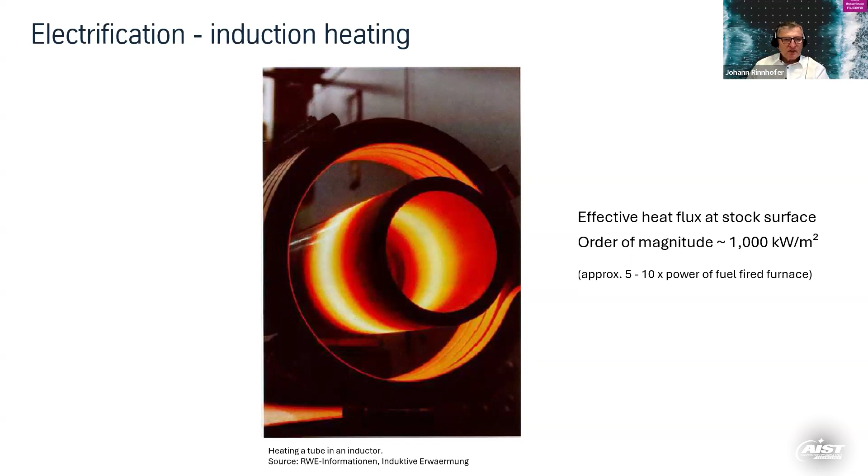There are also some restrictions. Let me explain the principles here. It's very quick, very intensive, because the heat is generated within the body - there's no external heat transfer. When you have an electric current, an alternating current in a water-cooled copper coil as shown here, you put in a metallic body. The changing current in the coil induces also a current in the piece, in the steel body.

So that's generating heat in the end. The power is the resistance of the material times the induced current squared, and the heat is the power times the heating time.

How does it work? There's a so-called penetration depth. This is the depth where the current is developing in the body - it's zero in the center of the body, but it's 100% on the outside. The value where it is only 37% is the so-called penetration depth, delta, of this specific situation.

The frequency you are using, the frequency of the coil, of the current, has to fit exactly the diameter of the workpiece to have an optimum heating. You see there are different pieces - that's very bad, the red one. This is optimum, the yellow one. The other ones are also in the middle.

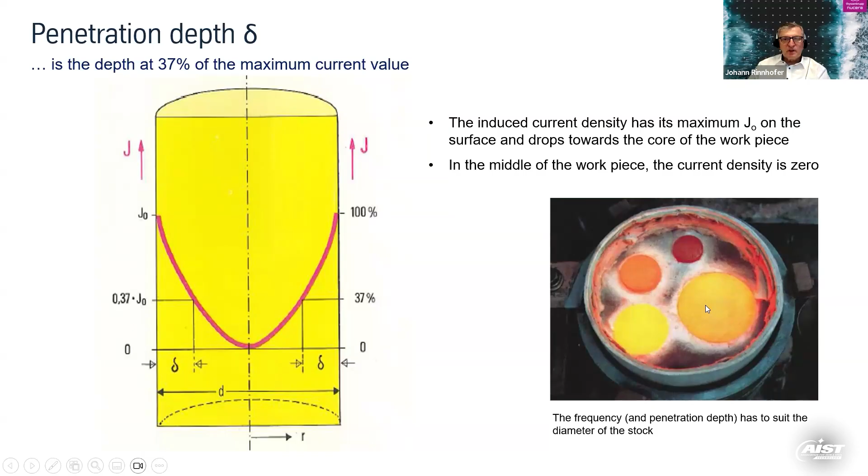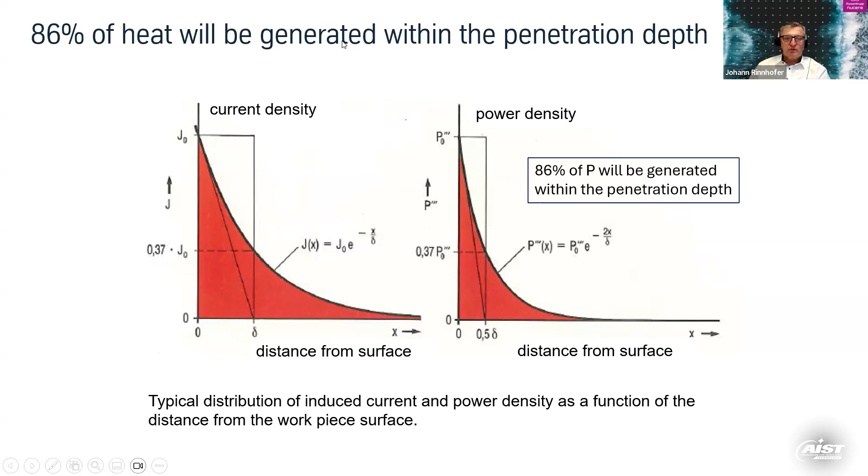Because we have the current here, the power is current squared. So 86% of the heat will be generated within the penetration depth - this is the message here.

The penetration depth can be calculated. It is proportional to the electric resistance of the material - steel is good, copper has a very low resistance so that would be a very thin penetration depth. And very importantly, it is inversely proportional to the frequency, so 1 divided by frequency, and also the permeability of the material.

So what does that mean? You have different penetration depth data - for example, you can have 10 millimeters under certain conditions, at certain frequencies, and so on. It's also very significant to note that steel, as long as it is magnetic, behaves in a certain area. Steel at 20 degrees with a permeability of 100 reacts completely differently compared to a non-magnetic steel, or a steel above the Curie temperature, which is more than 770 degrees.

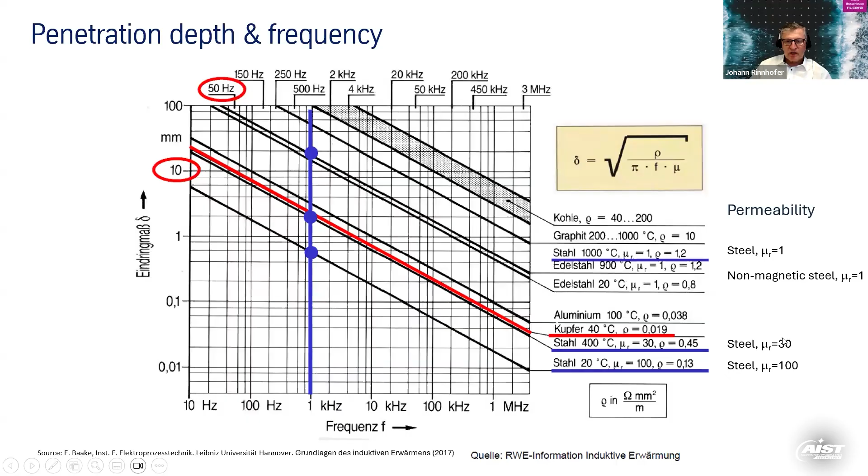Then it turns into 1 - from 100 to 1. So the heating is completely different in the high temperature range. What does that mean? For example, 1 kilohertz frequency gives you a very low heating time compared to 10 kilohertz. It's quicker at 1 kilohertz because the penetration depth is a little bit higher.

You see in 10 minutes time, you can completely through-heat a billet of 100 millimeter diameter, and that's very quick. Through heating is 0.1 minute per millimeter, recall the 1 minute per millimeter in a fuel-fired furnace. So it's really, really quick.

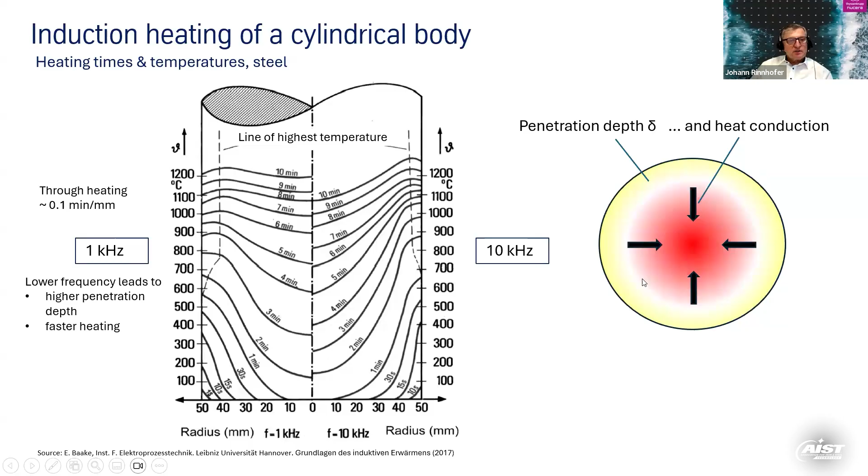You should not believe that the penetration depth and this inductive heating mechanism helps you with thick stock, because in the end you will have still heat conduction, thermal conduction in the middle of the piece. So you have to wait until you have an equalization process as well for thick stock - it's not as easy as it looks like probably.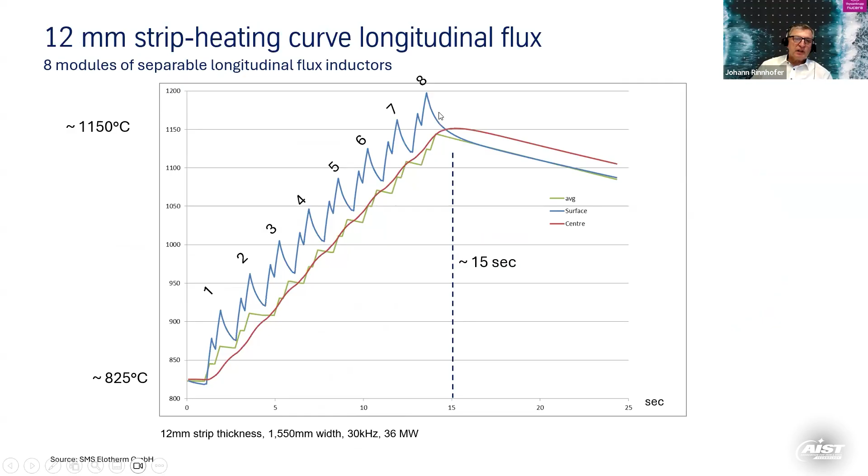You see here strip heating from 800 to 1100 degrees, very quick. In 15 seconds, you can heat a 12 millimeter strip from 800 to 1100 degrees - 15 seconds, it's not a lot.

This is how it looks like. One inductor after the other, water cooled. This is inline inductive thin slab heating in a steel plant. So you are casting steel strip, going into a furnace, going into the rolling mill, rough mill, next furnace, and the final mill in the end, and the down coiler here.

So you can use intermediate heating here, depending on the temperature you need before rolling, for example. So you are basically going with the slab through this slot, and you are heating up the slab in seconds—very, very quick. So these inductors are very powerful. You can have up to 5 megawatt per inductor.

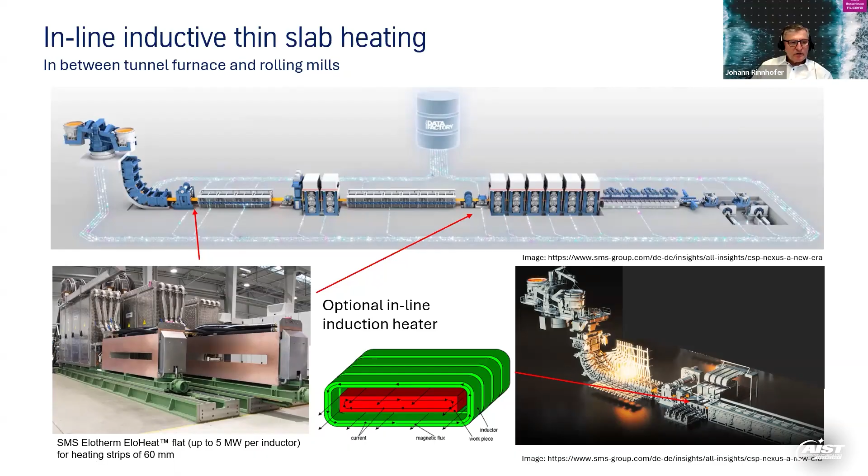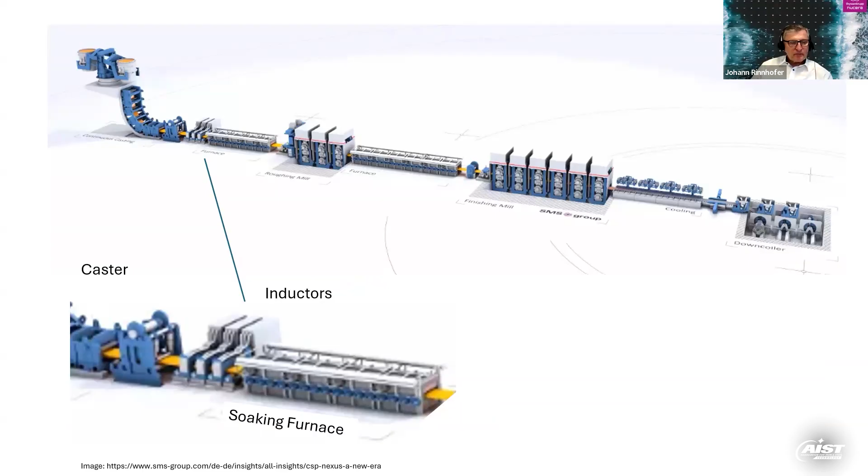Very, very useful, and this is certainly going into more use, these inline processes. Very, very, very good stuff. So you can see this situation here in an inline heating rolling plant. This is how it looks like. You see here the inductors, one after the other, heating up in seconds.

So heat quench and temper lines for tubes, a very interesting concept. So you start with a cold tube, for example for drilling tubes or oil field tubes, go into induction coils, heat it up to 1000 degrees approximately, go into a quench with water, come back again, go into the tempering furnaces for tempering, also with induction coils, come out here on the cooling table, and that's the end. Very, very good concept, very small footprint, but you have to be careful because API standards also allow some eccentricity of the tubes.

So you might have some material thickness which is different from one side to the other, and that has an impact on the heating, because the temperature will be much higher in the smaller, thinner area, so to say. So you have to be careful when you do that.

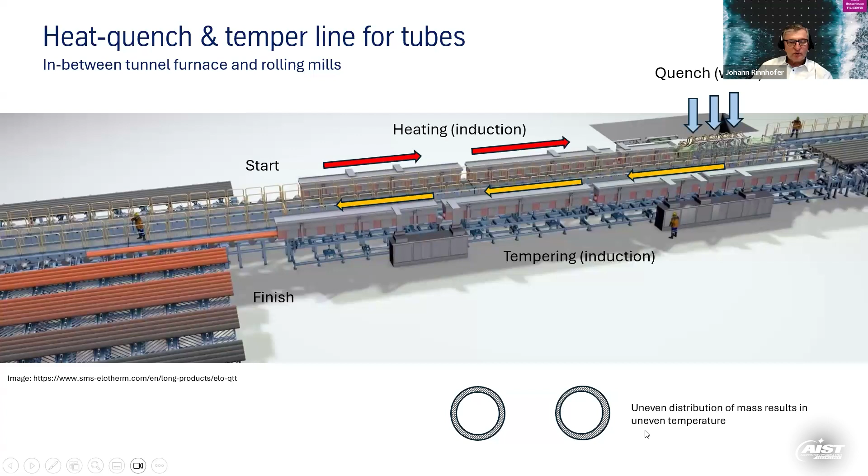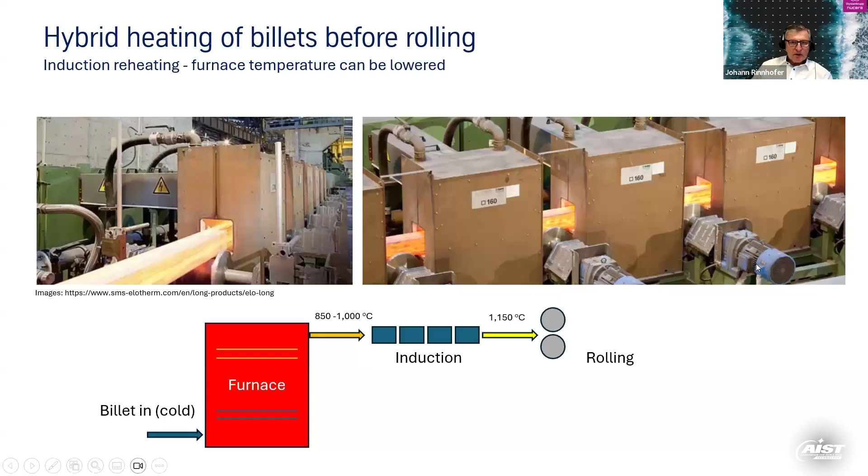And the other concept is hybrid heating of billets before rolling. So you have the furnace, you come in with the cold billet, go through it, you end the furnace not at 1200 degrees, you end at 800, 900, 1000 degrees, go into induction coils and heat up to the final rolling temperature of 1150 degrees, for example. That gives you the option to minimize the exposure time at high temperatures, so you minimize scaling and have a very small footprint. You can operate the furnace at lower temperature and optimize the energy consumption. That's also a good solution here shown for a square billet, 160 mil square.

In the end, you also lose some energy. Electric heating, also in the inductive case, you have cooling water because you have to water cool the copper coils. So you lose a lot of energy for the cooling water. You shouldn't forget that—there are also some losses.

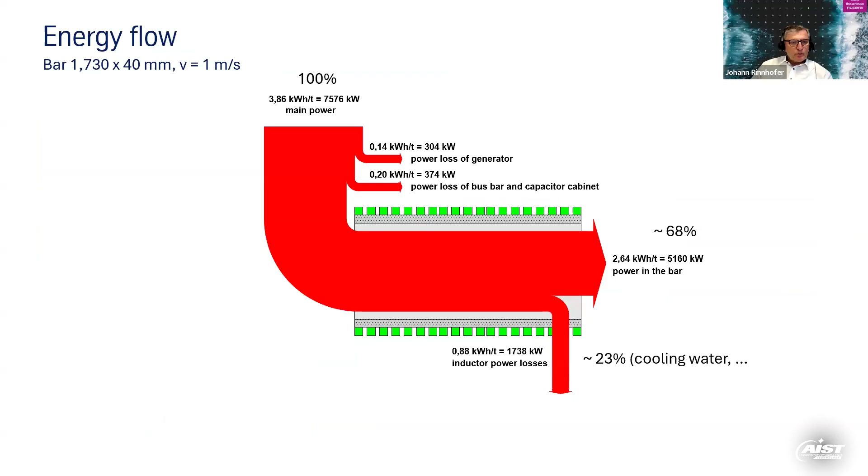So the question is: natural gas, hydrogen, or electricity? What is better? Certainly for heating purposes, direct electrification is something you would look at in comparison to hydrogen if you don't have to, so to say, because you need a lot of electricity to produce hydrogen. I don't go into too much detail here in this calculation. So in the end, you will certainly use hydrogen in applications where it is of more use.

For example, thyssenkrupp nucera is now building 740 megawatt electrolyzers for Stegra in Sweden. This is the green steel plant being built in the northern part of Sweden—740 megawatt electrolyzers to produce 2.1 million tons per year of DRI. For that, you use hydrogen instead of natural gas or coal. And for that reason, it's certainly a much better application for hydrogen in comparison to a heating purpose, to be honest.

And here you see the electrolyzers we are building now. The plant is almost finished, completion is ongoing. We are building this—a 20 megawatt unit here, only 20 megawatt, but it's huge—40 meters long and very, very powerful.

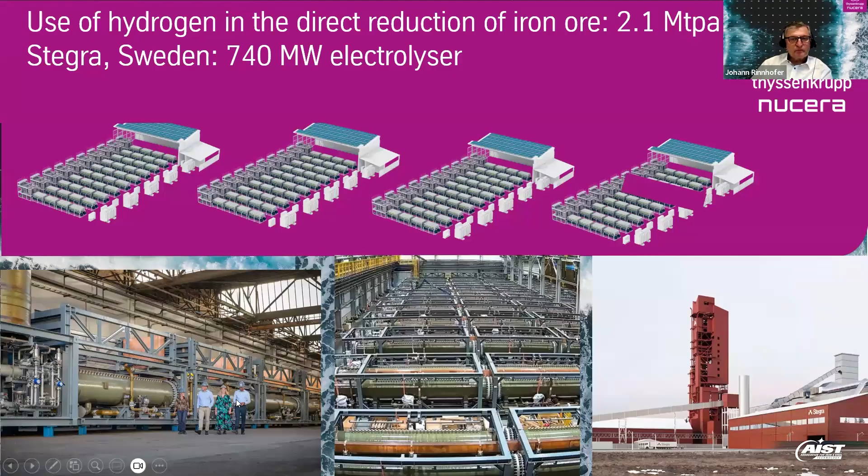So the conclusion is, wrapping up: consider your current heating strategy of the existing furnace to reduce energy and emissions. You should make a health check of the furnace, including, very important, the air and the pressure of the furnace.

Heating with alternative fuels is possible. Electrification is technically possible, yes, but also consider hybrid solutions because there's not one fits all solution. And also check the impact on the final product because everything has an impact on the steel you're heating. There is no free lunch, so all options come with energy losses and also operational challenges, cost and so on.

The future belongs to heat integrated solutions, in my opinion. So minimizing reheating requirements. The best thing is not to have the need for reheating. Why are you cooling down to room temperature, for example? Why don't you use a higher temperature? If it is possible, you should do it. And this is the way it goes with these inline solutions, which I have shown before.

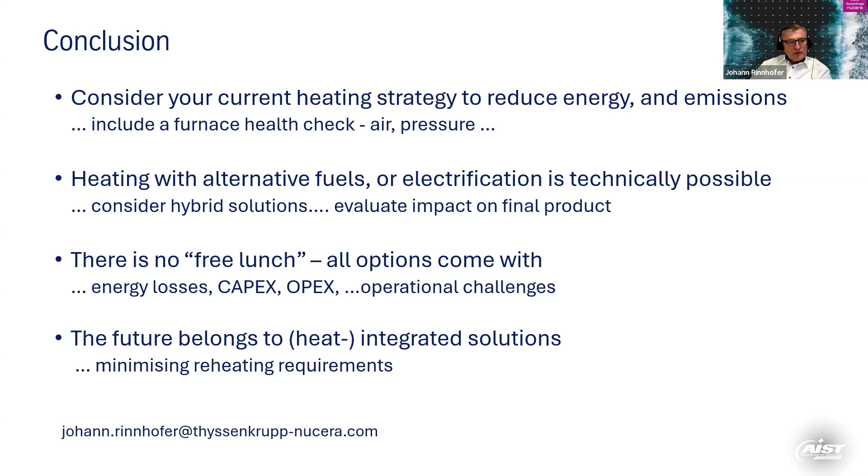And overall, let's never forget that we are in a very, very competitive industry. So one kilo of steel costs less than a liter of mineral water. It is a very competitive industry. So what we do has to make sense. It has to be operationally sensible. It has to work, and we have to look at the cost of what we are doing.

Thank you, Johann. That was absolutely fantastic. Great presentation. Thank you for putting that together, taking the time to put that together for everybody. I found it fascinating, very relevant for the steel industry, everybody in this webinar. So I'd like to take some questions from the participants.

Okay, I think there is a question from Christopher Liburn. How can we access this recording? What we can do is, I know it will be recorded on the AIST website, but if you could shoot an email, I can send the link to you to watch it later.

And Michael, do you want me to ask a few questions or is everyone else thinking of a new question? So that was a really good presentation, Johann. It was really informative, and I myself learned a lot. And you covered the detailed part of the industrial aspect of it, but you also got into the theoretical part of it, which is covering both worlds, I will say. So that was quite interesting.

I'm just curious about what do you think is the strongest lever for reducing energy consumption and emissions in reheating? Because at this point, we are thinking about reducing emissions in different parts of the steelmaking process. So where do you think we could use that lever to reduce energy consumption?

Thank you, Saba, for your question. In the end, as I said, there's no one fits all solution. Generally, I think reducing energy and emissions requires a close look at the existing furnace structures and the heating strategy, as I said, off-gas temperature, preheating temperatures of air, etc. This is what I mean by a health check of the existing system. You obviously can play around with all the parameters, like off-gas temperature, as I have explained it. You certainly would look at more integrated solutions, if possible. I always say if possible, because we don't live in an ideal world.